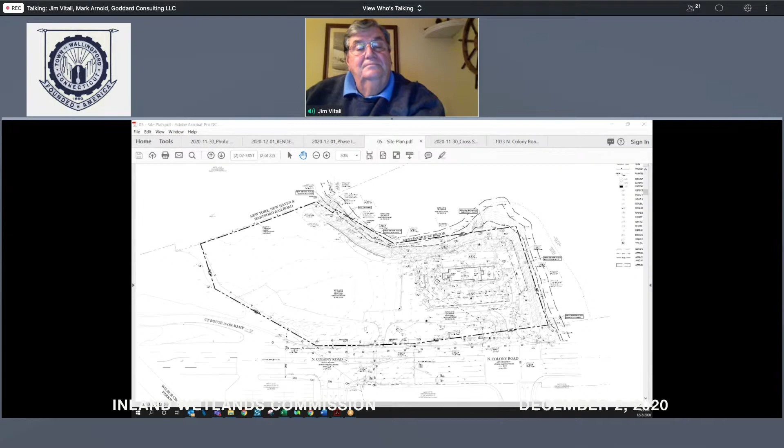Josh has pulled up the existing conditions plan. To the north we have the Sonic development, with the building fairly centered on the site. Meetinghouse Brook flows from the northeast to the southwest of the site, along the north and west sides of the property. The northwest corner is where we found a natural shelf of floodplain soils, deposited by a fairly large flood. We found deposits of about 23 to 28 inches over a buried topsoil, which is typical of a floodplain, consistent with what I've seen during my master's work in soil science.

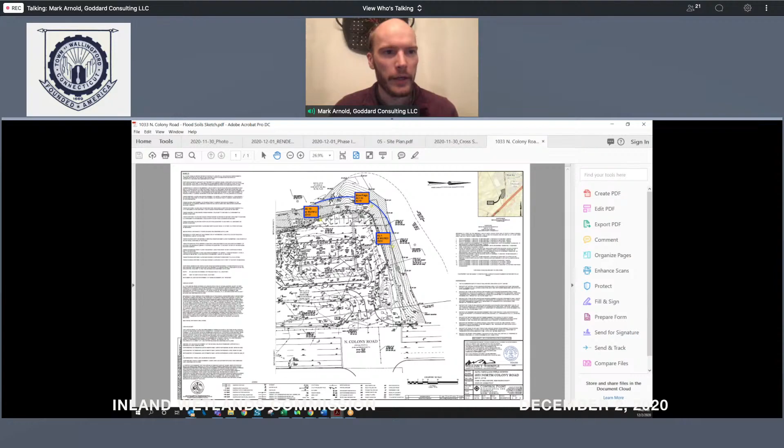That area is flagged S12 to S21 in the northwest corner, over 100 feet away from the proposed Lot A, where the development is proposed. As Josh shows the cursor there, in that northwest corner, we found a nice shelf about 4 feet above the existing flow pattern of the stream, with a buried floodplain soil meeting the definitions for floodplain and alluvial soils protected by your commission. We reviewed the rest of the bank flags to see if there were other places with fluvial or floodplain soil deposits, but we didn't find any others.

We did review the original delineation for the Sonic project and the other two buildings. The delineations are fairly consistent with respect to topography and the edge of the bank, and we feel that we have a consistent delineation.

You'll notice that the existing conditions plan doesn't show those floodplain soils, but as they are more than 100 feet away from the proposed project, we didn't think it was necessary to put those on this plan. They're located off of S12 to S21, and you can see the location of S21.

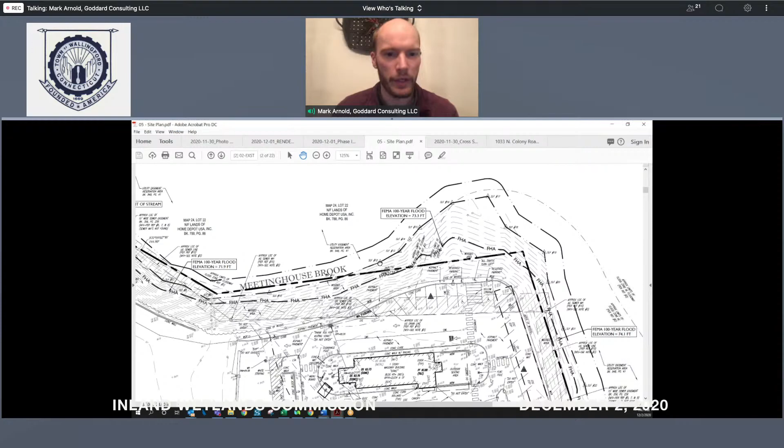It's more than 100 feet away from any proposed work, which is far south of the Sonic building. So those are the existing conditions. I'm glad to answer any other questions from the board about the existing conditions and just to make sure the resource areas are understood.

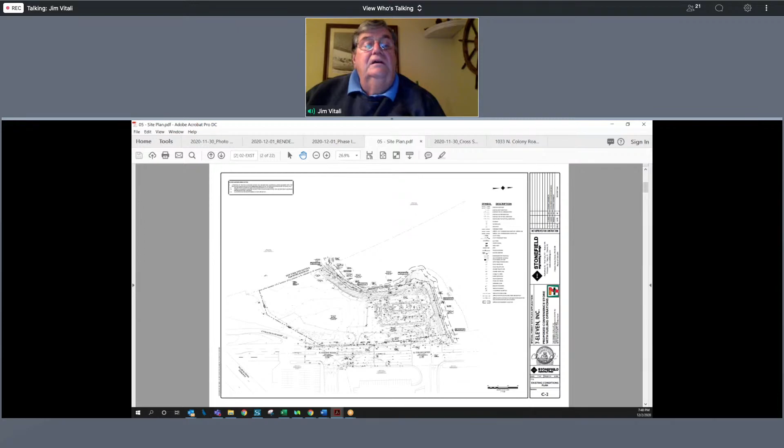I don't know if the commission's got any questions at this point. I think we can, so I'm gonna pass it over to Josh. He's gonna present the proposed project, and again, I'll be here to answer any questions about the resource areas and impacts if needed.

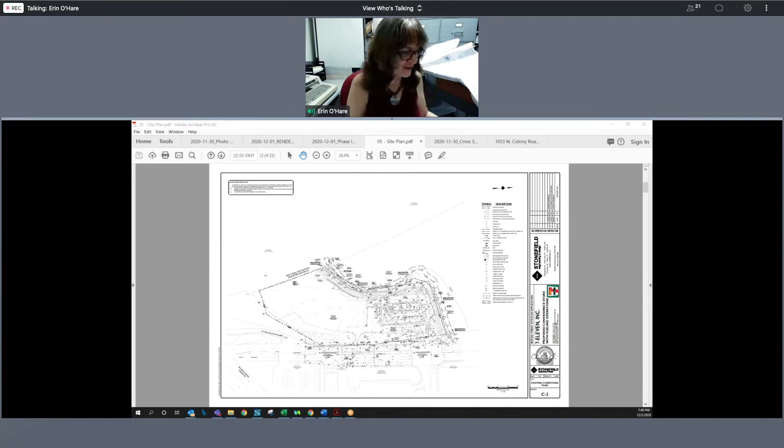Mr. Chairman, can I ask the soil scientist a quick question? If I may, yes? Yes, sure. Oh, I didn't know if I was being heard. Okay.

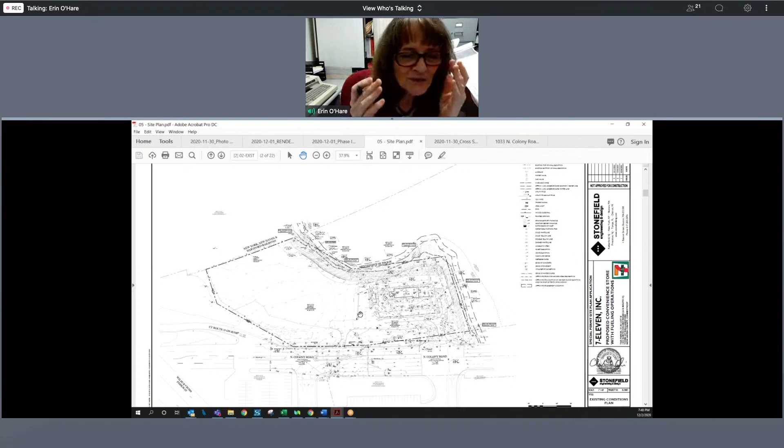I sent out a copy of the 2009 soil plan attached to my October environmental planners report, which I believe you got. I hope you got it. Okay, so I guess fundamentally, that person, Tom Petrus, was the soil scientist for that application.

And he shows the alluvial floodplain soils going right down, clear down, all the way south, right? So my question is this: I've never been in the field with someone to educate me as to when you have floodplain soils - they come up, they're deposited, it's sort of like a moving thing.

They're constantly being deposited. So tell me if this could be it: could it not be that the day he was out there had been a lot of storms, and then a big storm comes through and washes it away, and now you go out and there's no deposits - they've been washed away? Or is that not how it works with alluvial soils?

It is very possible that you could find that. It would have to be a fairly large storm. The deposits we found were 23 to 28 inches deep, so that was a pretty significant storm.

It could have been more than 100 years ago that there was a flash flood in that area that deposited over 2 feet of sediment on top of an original topsoil. So in the sense of this site too, the stream area would also be floodplain soils because it's within the stream bed.

So I guess from his delineation to our delineation, we would rather call it a bank versus actual floodplain deposits that are in the river. But otherwise you can see the bow that he has in the northwest corner of his plan - that's the same bow that we found on the shelf there, which makes sense consistency-wise.

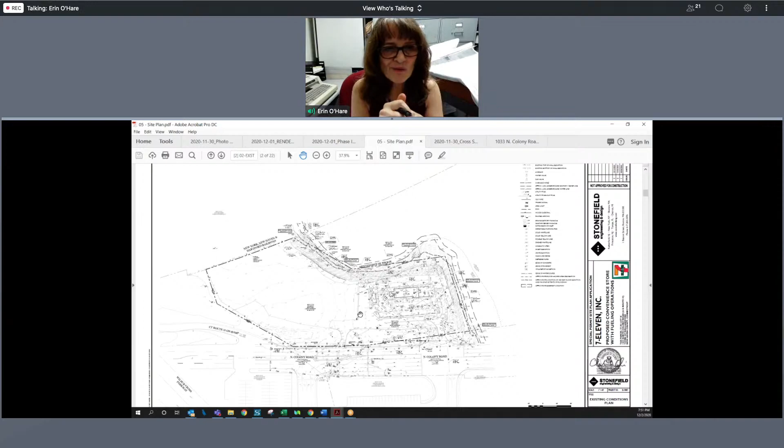Right, because it's lower. It's lower, and also the outer curves of the river are going to see more erosion than the inside curves.

So as the river flows to the west, it turns sharply to the south, and on that curve, the undercut is pretty significant in the northwest corner of the river there, where it turns off site. It's a pretty significant undercut that's happening there, and that's changing constantly depending on how large the storms are each year. All right, thank you.

Jim? I have a question for him. Go ahead, Nick.

When we approved the Sonic to go in there, we talked about that lower area he referred to and pointed out to us. My understanding was they were going to get it stabilized and leave it alone. Now the new 7-Eleven is supposed to go south of Sonic in that parking lot area. I went by there today and saw they were doing some core boring. Is that samples of the soil that's sitting there, or what's the outcome of that?

Are we going to get a report on what you're doing there today with core bores? Josh, do you have a picture? I saw some of the geotech data, but Dennis, you might have a better idea of the more recent borings, maybe at the direction of the owner. We already performed geotechnical testing across the site, and that was included in our engineering report that both Erin and Allison reviewed. We have gone out and done testing throughout the project area.

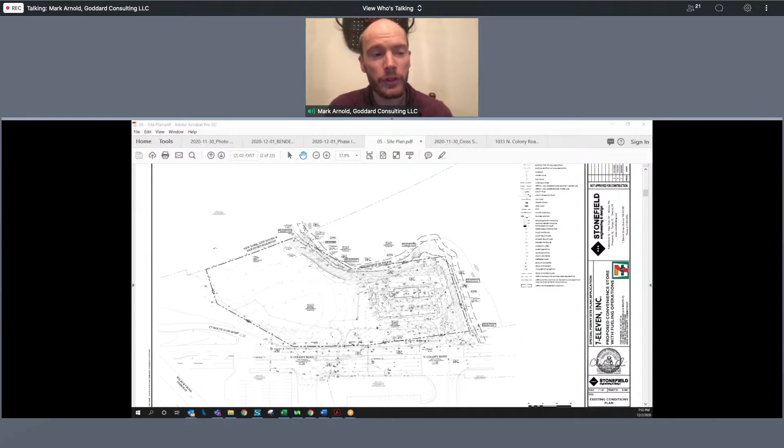All right, because it's a 7-Eleven, you're going to have underground storage for fuel. Are there special permits you have to get from DEP being this close to the brook?

It's probably a better question for me. I'm happy to take over and give a quick rundown and presentation of what the proposed improvements are. Mark, I don't know, I'll leave it to the chairman. If there's any other questions, I can definitely take over and give the full presentation.

I'm not sure if Nick's question got answered. I was looking for the answer. What was the question again, Nick, regarding the tanks being installed?

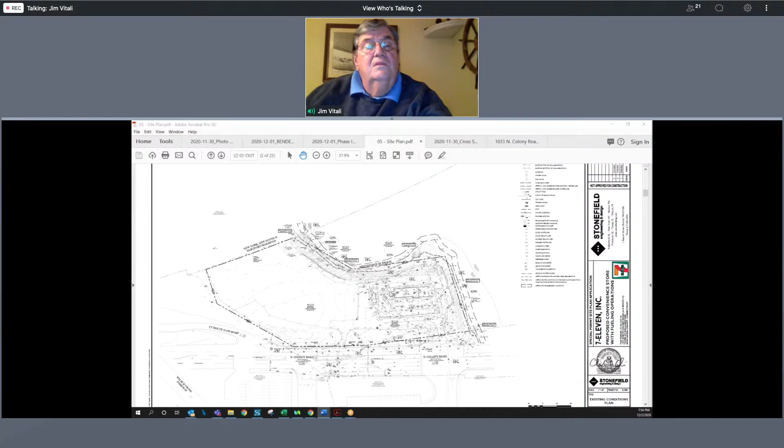Well, I'm concerned about the type of soil that's there, and because we're so close to the brook with environmental issues, are there any special permitting that needs to be done through DEP or the state of Connecticut to put underground vaults for their fuel, their petrol? Is there special sensors that need to be put in because of that area?

The other concern I had was they're going to be south of Sonic, that whole big vacant lot. You can see it in the picture here. Are they not going to be anywhere near the brook? I hope, unless they're going to do some more stabilization to that brook. But the focus of the 7-Eleven site is going to be right off North Colony Road, in that big parking lot, where today they had a hole tester doing core bores.

So I'm just confused — all I asked was, are there special permittings because they're so close to the brook? What, you know, is it a fiberglass tank? Are they steel tanks? What's going in the ground for petroleum products? What special permits are needed to do this project on this site?

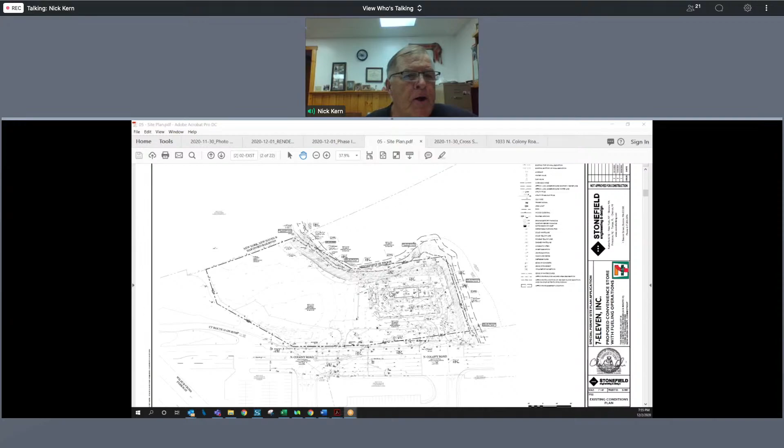Yeah, that's no problem, happy to answer the questions. I apologize, my camera went down. So the tanks are regulated by the state, so they do need to be in accordance with the state of Connecticut requirements.

Just to give some background on the tanks themselves, these will be double walled — I'm just pulling up the section. There are multiple layers of safety nets in place when it comes to these tanks, and they will be installed in accordance with state requirements. So these are double walled underground tanks, with space in between the tanks. There's also a sensor located between the two tanks that is fed through an automatic tank gauge.

So basically this monitors the tanks and monitors that inner wall in between the two tanks. These are modern day double wall tanks, to the highest state standard. But if there were ever any intrusion or issue, there are sensors that would immediately notify the tenant. They are monitored daily, and all this information is reconciled and provided to the state because of the tanks.

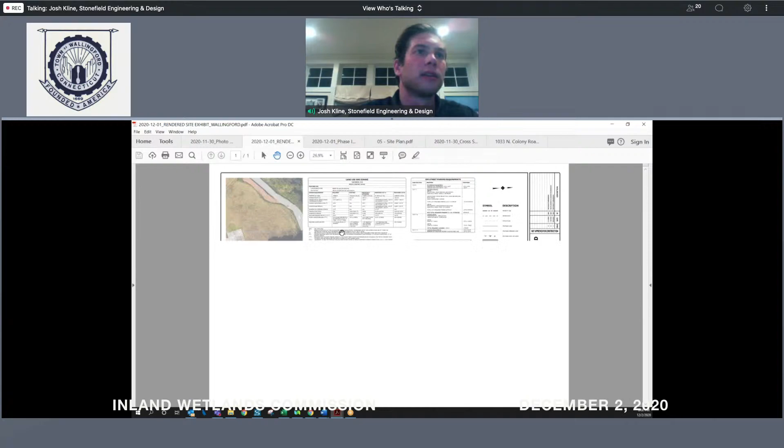Snow storage has definitely been thought about, and we will not be putting snow on top of that slope. I'll share my screen and pull up the plan to give you an idea. Here's the existing condition as Mark went through, with Sonic on the right-hand side of the screen. A condition of approval would be agreeable that no snow would be stored at the top of this slope. There'll be areas carved out along the left-hand side of the page, along the on-ramp, as well as some areas down on the frontages where snow will be stored, but no snow would be stored on top of bank.

Okay, is the state of Connecticut going to allow you to store snow in front of the entranceway for the 7-Eleven, that close to the railroad traffic? We're working with the state. The project does require approval from the state, and snow storage areas will be represented to the state. We're seeking an encroachment permit for the driveway as well as the signal, and we would follow any state guidelines or recommendations. If they deem snow could not be stored there, it wouldn't be stored within any sight line. This is a signalized intersection, so we don't see any issue from that perspective. All snow would be stored, and the big takeaway for the commission is that it would not be stored along the top of bank.

Okay, thank you, Josh. It's a funky stoplight, I guess.

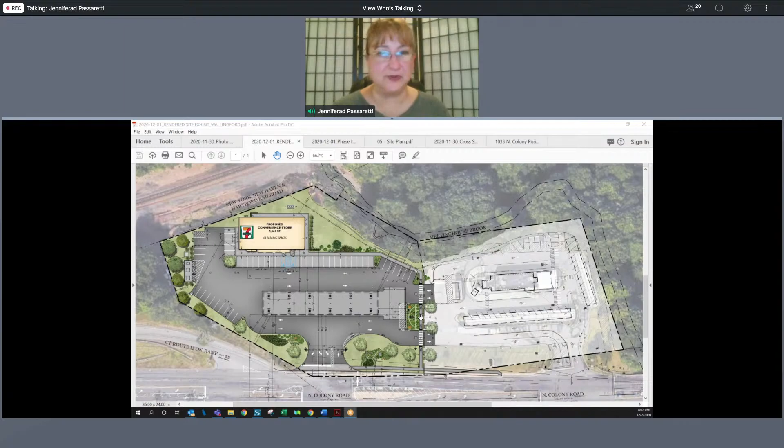What kind of control plan? A spill control plan in the event that there is some sort of issue. I know that they're going to be monitoring, and employees are going to be trained, and you're going to have spill kits available. But will there be some sort of formal spill control plan in the event of a spill?

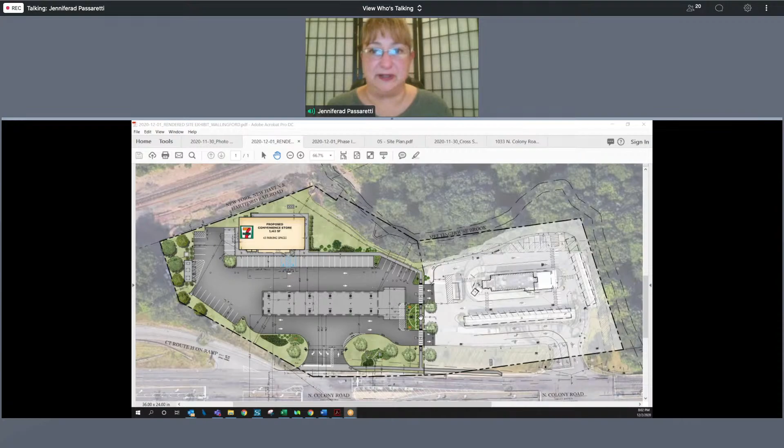So there is a standard procedure, and it is a requirement to have this procedure. It's laminated and included in multiple places, typically behind the register. So what I can do is pull up an example of this emergency response procedure. There's a plan in place noting two items: a large surface spill or substantial damage to a dispenser, and a small surface spill, with procedures for each situation.

This is included at the store and is part of the training. The key here is employees are trained to shut things down and contain the spill to whatever level they're comfortable with, depending on the actual spill. Then they immediately notify 7-Eleven or the online third party 7-Eleven uses to create a case, which is brought to the state, and it also immediately notifies a local environmental consultant who would be dispatched to the site. This is monitored 24 hours a day - the paneling, the alarm systems, all this information is closely monitored by the team.

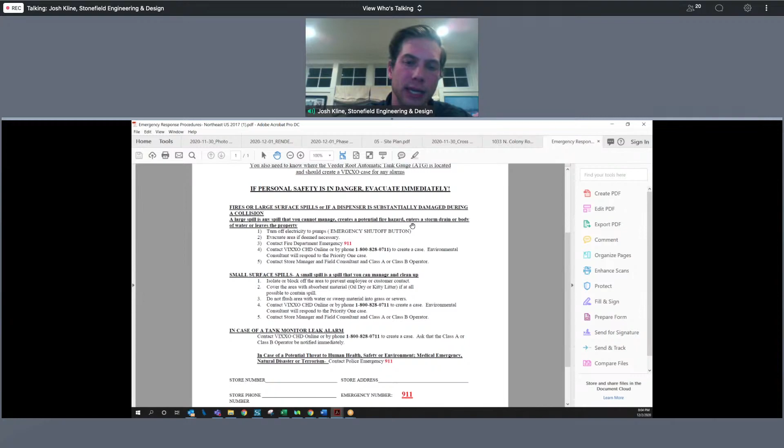Josh, two questions if I may. I missed this page you have up on the spill plan - where is that in the submittals? We did not submit that as part of the formal submittal to you. We brought it prepared to talk about based on our conversations, but didn't send the printout to you directly.

Okay, anything you show tonight is part of the record, so if you could furnish that page, would that be possible? Yeah, no problem at all.

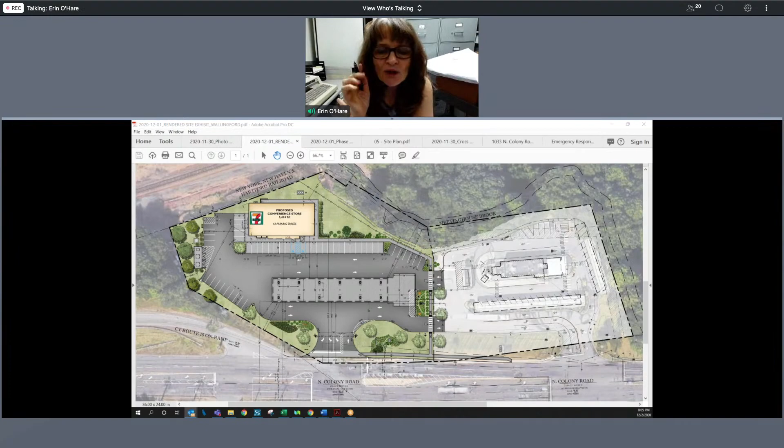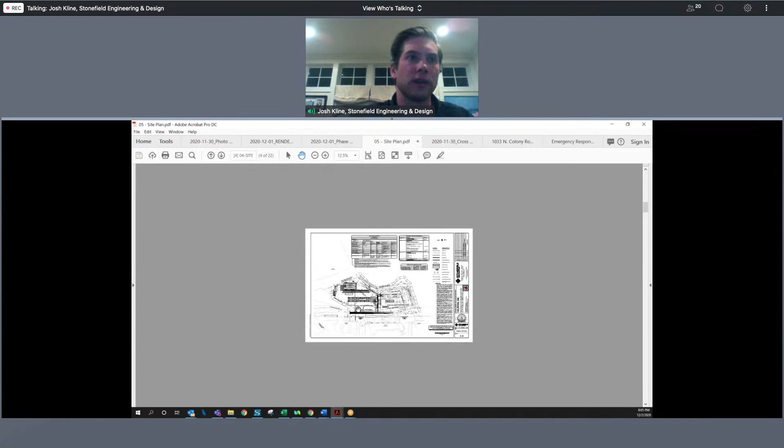And the other thing, while we're on gasoline issues, could you talk about that trench you put at the end of the gas island? Yeah, no problem. Working with Erin, understanding the sensitivity that a gas station brings to any project, the applicant is proposing a trench drain located along the north side of the underground storage tanks. One of the design features our team incorporated is that the site is graded so the area where all the dispensers and fueling pad are located drains to this isolated trench drain, while the rest of the site pushes stormwater runoff away from it. This would allow, in the event of a spill, for it to drain solely to this trench drain.

And this trench drain - I'm going to flip to the stormwater management plan quickly, sorry to be flipping so much on screen - you can see this trench drain is connected to an offline oil water separator. During a low flow event or a spill, or the water quality storm, that initial first flush would pick up any of this material and drain to this oil water separator. Then during a larger event, once that first flush is gone and there's no remnants, we've designed this manhole as a bypass structure that would bypass the larger storm events, in order not to cause any issues or surcharge effect in this outlet structure.

Josh, let me ask you this - what's the capacity of this oil water separator? We're proposing a 1,500 gallon unit. Okay, and how is it designed? It's a three baffle system.

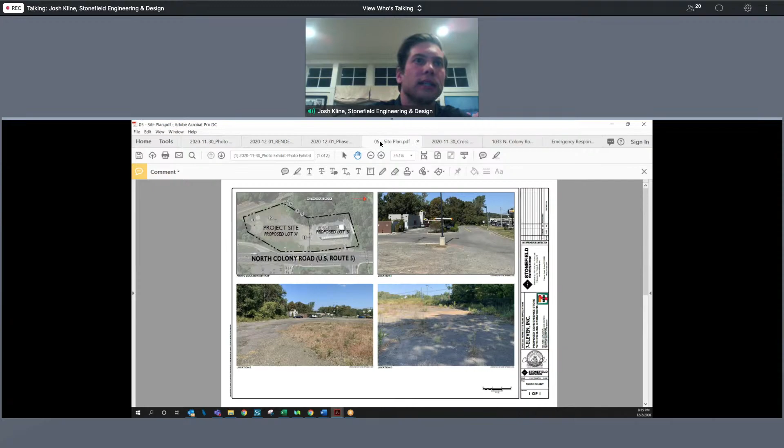In the proposed condition, one of the big changes is we're pushing the impervious surfaces further away from the slope, outside the 100-foot upland review area. We've moved the building further away. The majority of impervious surface is now located along the frontage of the site, along the state frontages. We're replanting the top of this bank with landscaping and making this a grass area, pulling some of that pavement back.

What you can see on the stormwater management plan is that all of that runoff is collected, and we've created a single point of discharge that is protected and discharges into the brook. On top of that, we're naturally having less runoff because we're providing less impervious surface than what's out there today.

On top of that, we're also treating it—we're 100% treating all stormwater on site from all surfaces. In addition, we're proposing an infiltration basin. We performed testing on site and the soils do support infiltration, so we've proposed an infiltration basin to infiltrate an additional amount of the stormwater.

Some highlights of the stormwater system, from a peak discharge standpoint: comparing what runs off now to what will run off in the proposed condition, we're reducing the 2 through 25-year storm events by over 30%, and the 100-year storm event by close to 15%. One of the big values to think about is really the volume—the total amount of runoff.

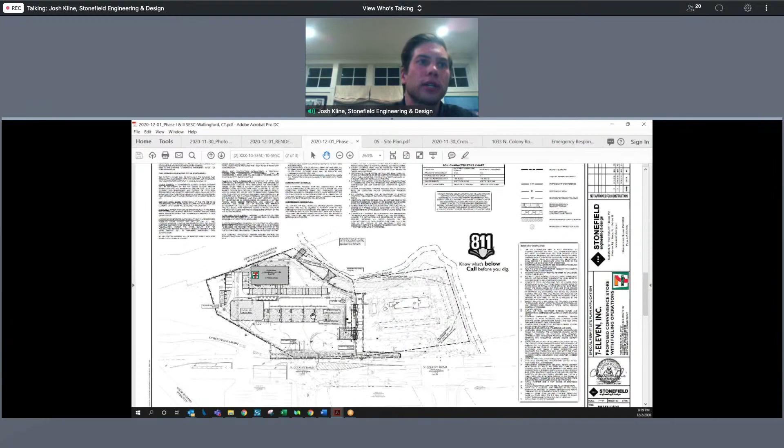We've also prepared a phase 2 soil erosion plan, showing the stabilized post-construction condition. This consists of more typical soil erosion control measures—silt fencing, inlet filters, staging and stockpile areas—and this is when those permanent controls are put in place to stabilize the site as they move forward.

Why don't you talk to me about the infiltration system you're using? Is it all going into an infiltration system, including the roof drainage from the building?

We usually like to keep that a separate, clean product—that's a great point, and really key to making sure an infiltration system operates properly. So what we're doing is sending the roof areas, which are typically clean, along with a portion of the vehicular areas, through a water quality unit to fully treat the stormwater before it enters the infiltration basin.

And what are you using for an infiltration system? We're proposing a perforated pipe system. Not an open bottom gallery, just a perforated pipe? No, the current design is a perforated pipe wrapped in stone.

And is there an outlet to that system? Correct—to mitigate that stormwater coming out, we're using an outlet control structure. And then that goes where? Following the plan, it works its way north to the Sonic property, where it connects to a structure. All the stormwater connects at a single point, manhole 104, and from there it discharges through to the outfall.

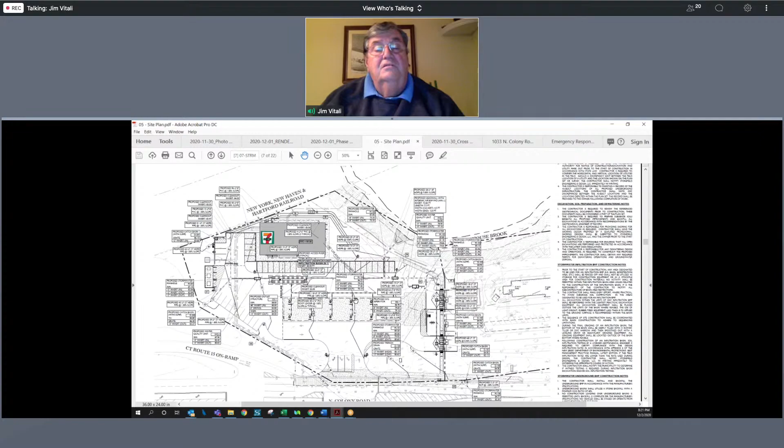So there's no other infiltration system other than the one right in front of the building? Correct. The thought process was to treat as much of the site as we could, but we're sensitive to the fact that this is a gas station. Even though we're proposing grading to push runoff away from the gasoline areas, we're not proposing to infiltrate any runoff located close to the fueling areas, just as a precaution.

But you have no retention or detention basin affecting the other stormwater runoff—that's a direct discharge to Meeting House Brook. Well, it does go through a water quality unit before reaching Meeting House Brook, but the project as a whole is reducing the amount of impervious area. So even without detention or retention systems, we're naturally reducing the peak discharge going to the brook.

Commissioners, any questions? Jim, it sounds like to me that he's got the whole underground drainage system all tied into one package that has one discharge point. I think they need to go back to the drawing table and segregate the emergency spillway. Their underground water discharge does not sound right for this application, unless I misunderstood him.

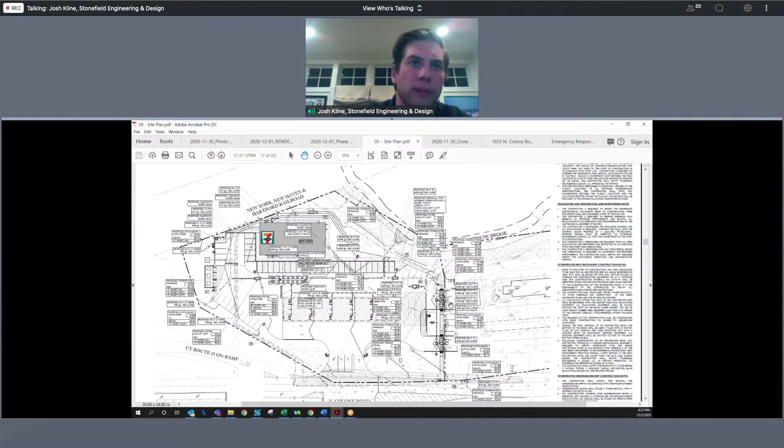And again, effort is made - we don't want to have multiple discharge points. So yes, it all kind of collects at one point. I will say, kind of going back to the design here, this system is designed with multiple controls, multiple alarms. The idea is that this system is designed to minimize spill events to the greatest extent we can.

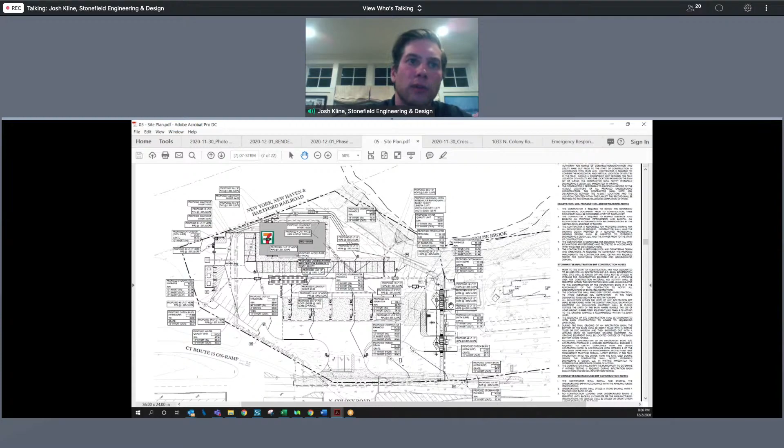And what we're doing in terms of having a water quality unit, providing the oil water separator, kind of allows for those additional precautions to mix in there as well. So we're happy to provide another additional item you kind of see with gas stations.

And we would, if it helps resolve some of the concern you have, we can do kind of grooved concrete around the perimeter of the dispenser islands, so that maybe any of those little remnants you're concerned about would be caught in there. And that would be observed and viewed by the 7-Eleven team, and they would be responsible for cleaning that up in a situation that it would need to be.

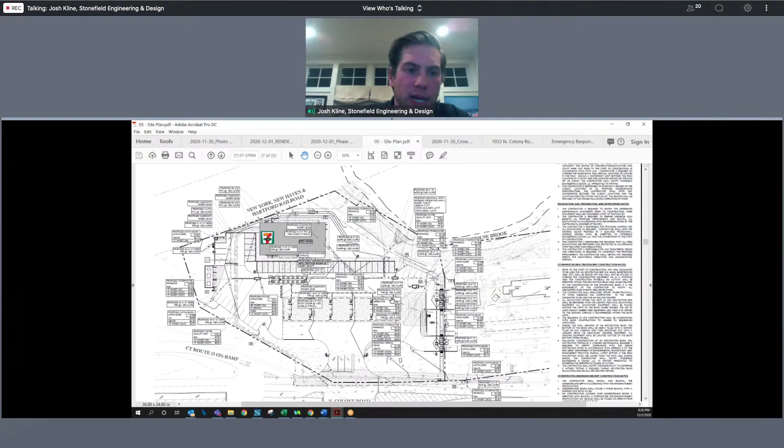Well, that's what I'm trying to say - I think you need to go back, not to the town of Wallingford, but to your 7-Eleven team and say, hey, Wetlands brought this up as an issue, how do we address it? Maybe there's another way they can contain it and segregate it if it needs to be segregated. But this is not going to work as a water oil separator, water quality system at this site for what you guys want to do.

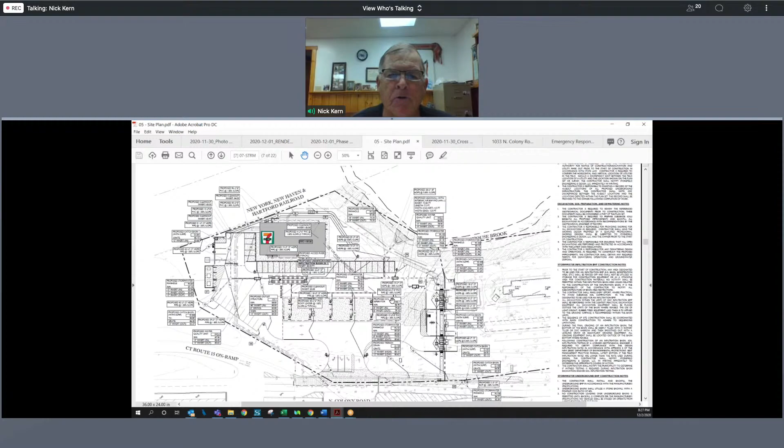So I can understand Wallingford Water and Sewer Department being concerned because this is one of their pet peeves, but this system is not going to work on 7-Eleven sites. So I'd go back to your gas people and say, hey, we have an issue here, we need to mend it.

Josh, I've been involved and I have seen systems in a drainage system with oil water separators that actually have a valve in the system, so that before it got too far down the line, you could open a manhole and shut the valve off to the 12-inch pipe. Might be something to look at.

Any other questions, commissioners?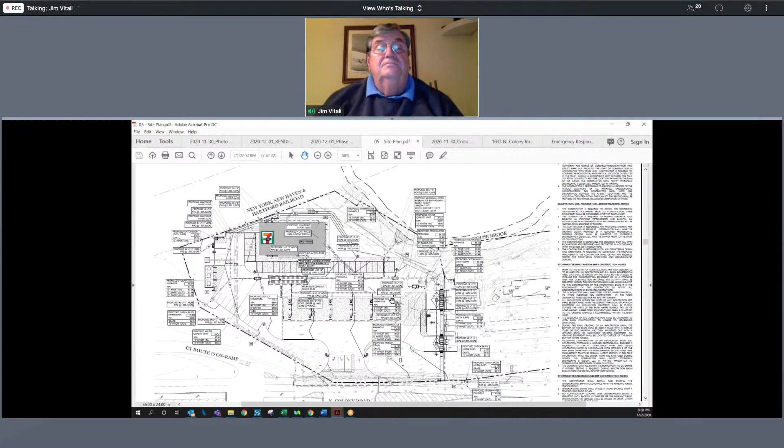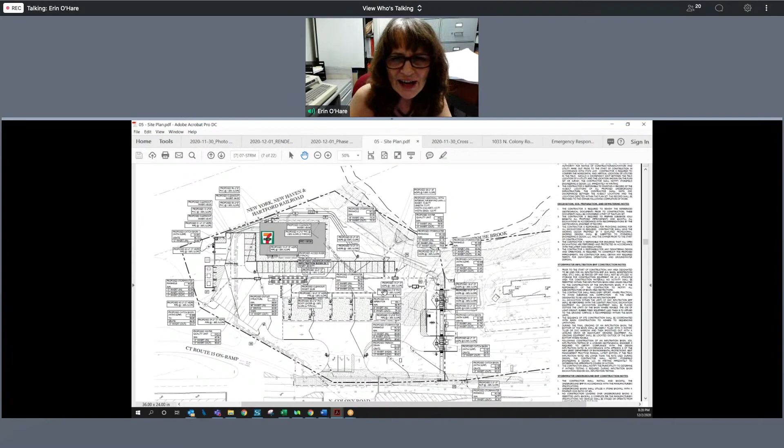Erin: Before we get to the next sheet that I know Josh is going to go over with the slope issues - Josh, you've said several times that the overland runoff from this site today goes over that slope and can cause erosion, so I'm confused. Maybe tell me about that unique little low concrete wall, about 9 inches high, that runs along the top of the slope by the brook, at the edge of the gravel parking area.

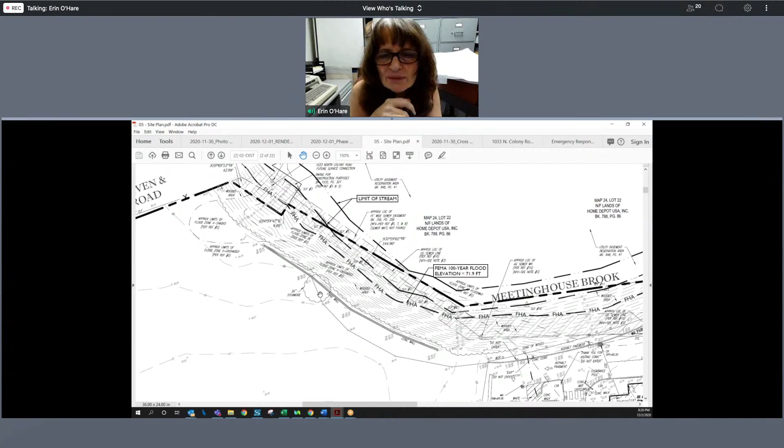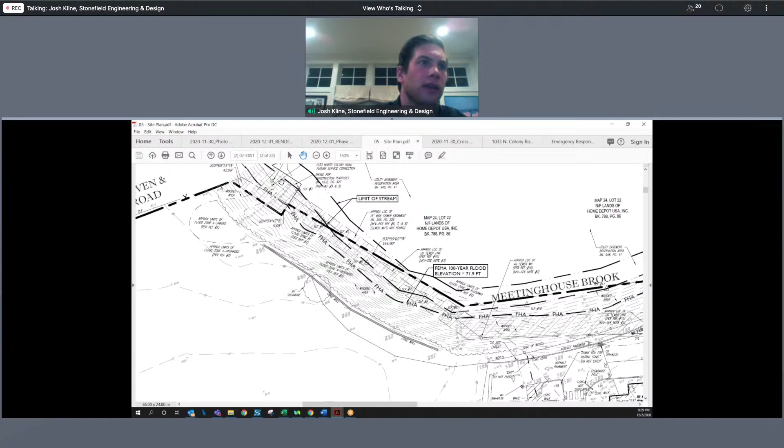Right, where you're pointing, right there. Doesn't that hold it back, or no? Is it porous? Not really - the concrete wall is in disarray, and water still kind of sheet flows on either end of it. If the wall were to fully act, it would probably create an even worse condition than water spreading out and flowing evenly over the slope, because it creates two discharge points at the top of the slope. But based on when I was out there, it may divert some runoff - the majority of this runoff is kind of flowing down over the slope regardless.

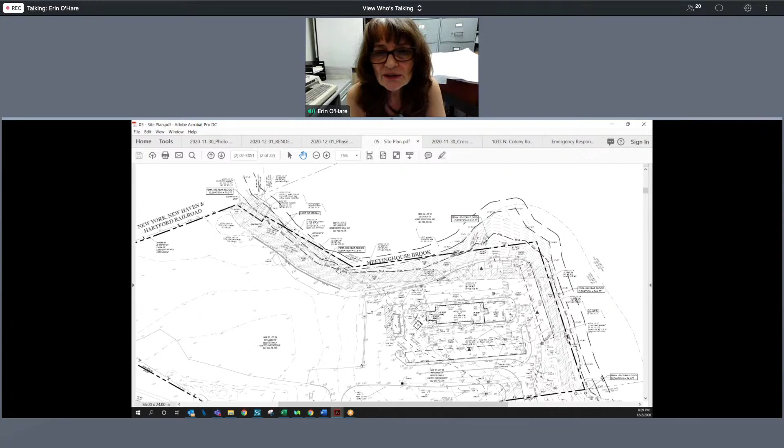That little low wall is only about 8 inches - it's really not a wall, more like a big curb. Whatever it is, it's gonna stay, correct? We're looking to maintain it, just to minimize the amount of disturbance within the upland review area. Okay, good, thank you.

Okay, next - go ahead, Josh. You got more to show us?

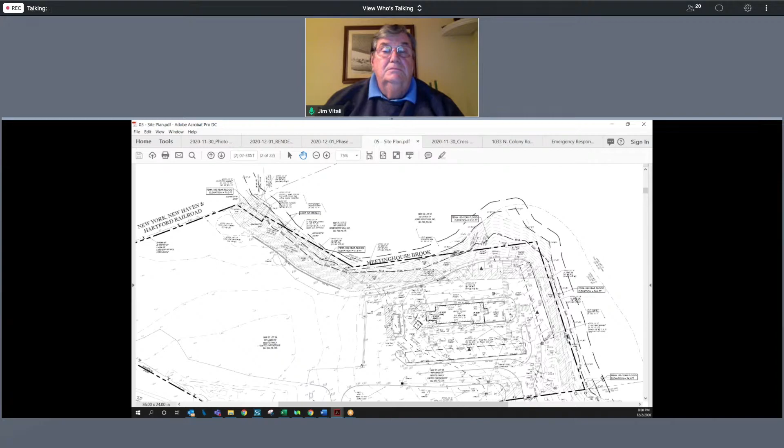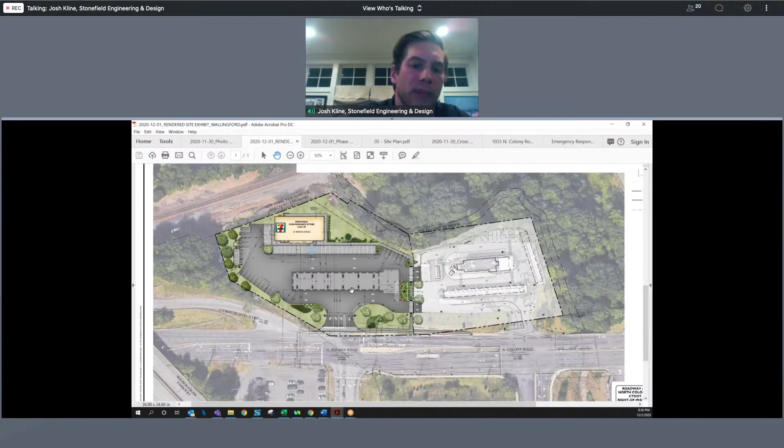I think we've touched on most of the scope of the improvements, so I'm happy to answer any questions or provide more information. I think we've heard some of the concerns, and that's something we're going to take into consideration. A lot of the items we've been working through with Erin, our office has really taken to heart and looked to address, and we feel that at this point we're providing a good plan that does look to minimize the impacts to that slope and to the brook.

Let me just point out - you drew a nice plan, that's fine, you did everything you think is correct. Now you've got to find a builder that can do the work and keep the environment safe. You have a steep slope, it's going to have a rundown, it's going to have a pipe sticking out, you're going to be over there with the sewer line.

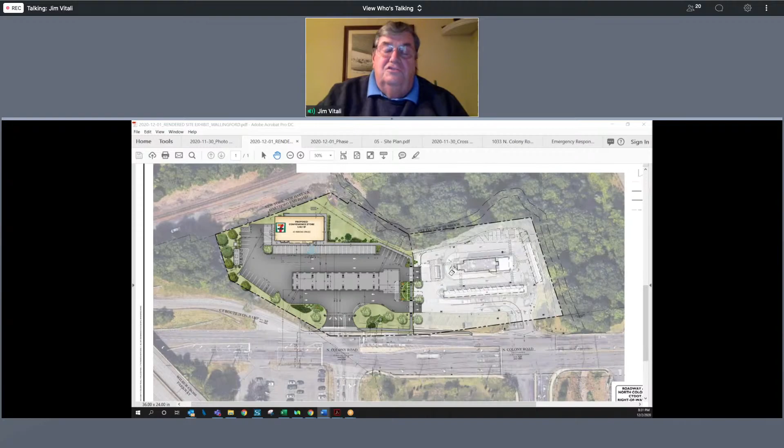I think your next presentation has really got to focus on how you're going to construct that when the time comes. I'm happy to talk about the construction of it. Josh, are you going to put up that cross-sectional view you emailed me tonight? Yeah, no problem. I think that's a great point - a key to any project is a good contractor.

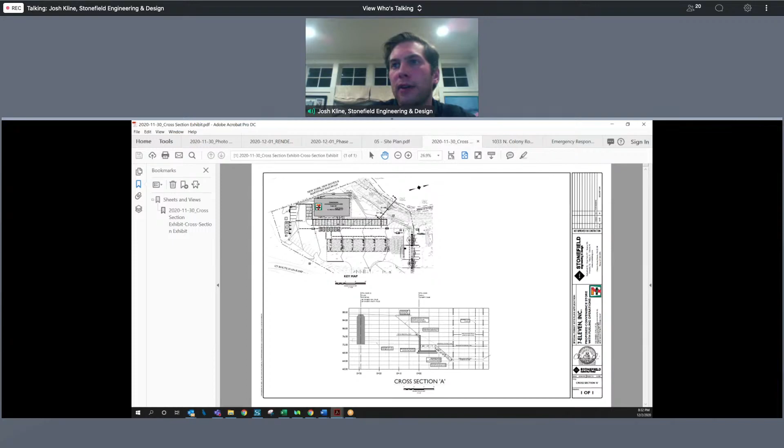There are definitely a few different means and methods a contractor could use to construct this slope. Based on our proposed disturbance and feedback from working with Aaron and the previous approval, we've looked to maintain that minimal amount of disturbance. You could accomplish this through the use of trench boxes, or various ways of temporary shoring, in order to install these improvements within the slope.

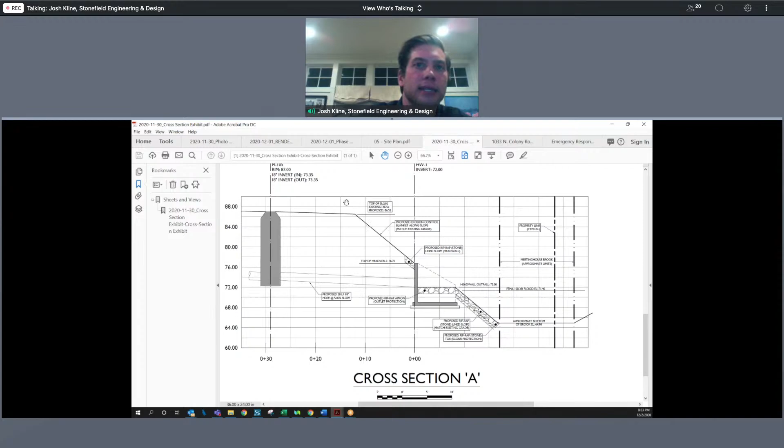So as requested, we put together a cross section which highlights the proposed improvements along this slope. A couple things to note: we are providing a riprap toe, basically scour protection at the bank itself, and we are going to be riprap lining the proposed slope. We have a riprap apron for the outlet protection to dissipate the velocity within the head wall. We're also providing an additional toe - a riprap lining above the head wall itself - to help stabilize this proposed slope. The proposed slope will then be lined with an erosion control blanket to stabilize it as well.

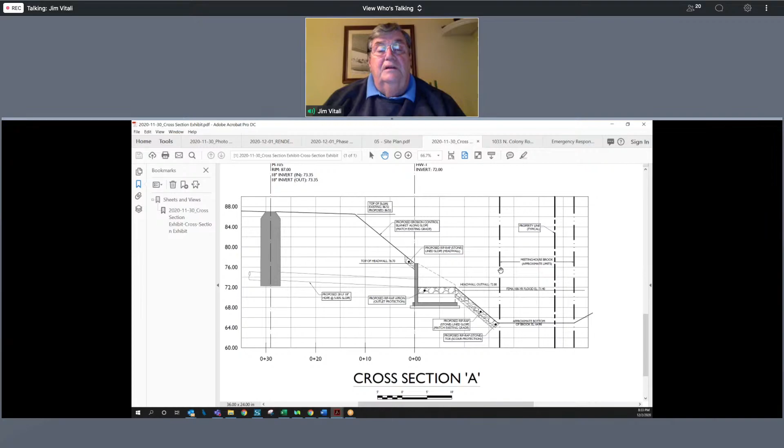Meeting House Brook is notorious for washing out, mainly because of stormwater coming down from adjoining property, not property in the town of Wallingford. With this riprap slope out at the end of the discharge area, I'm wondering if it makes more sense to spread the riprap out further upstream of Meeting House Brook. I'd hate to see one of the crazy floods wipe out or undercut the riprap, and next thing you know the head wall falls out. I think that needs to be looked at, which you may have already. I'm just pointing out my observation.

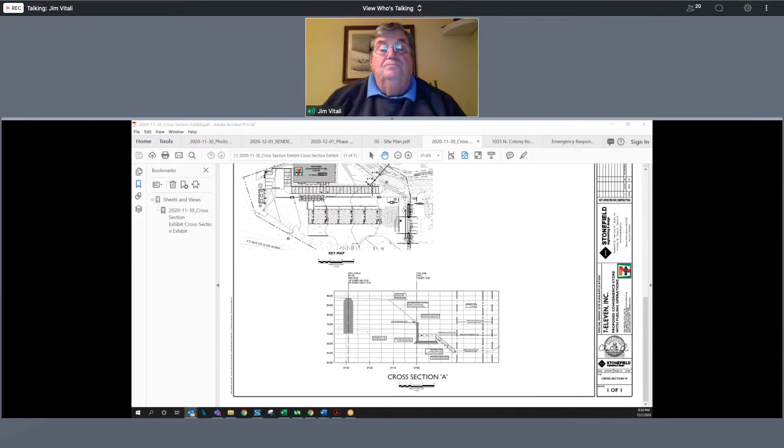Yeah, Josh, I believe the riprap is set above the floodplain, so we've considered the flooding already in the sense of where we've placed it. Josh's plans are pretty detailed. I'm a certified professional in sedimentation and erosion control, and I inspect sites under construction near rivers and resource areas, and Josh's cross section is an excellent example of how a site's supposed to be stabilized. I think the details provided have definitely been carefully considered to protect the environment.

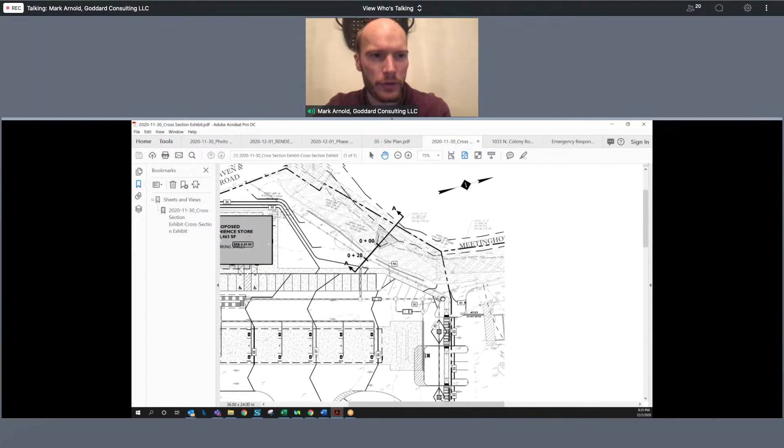There's definitely superior plans to what I've seen in other projects I've done with regards to that. You'll notice the riprap does fan out as necessary on each side, and it goes out beyond the edge of the head wall, so there's extra protection above and below for that anchorage. Again, the head wall is above the floodplain. The bottom of the riprap stabilizes that slope, and the sizing is large for the scour of not only the river but also any discharge that occurs. That large riprap proposed there is specifically for the situation.

Well, I know along that brook we've actually had some people we requested, and they installed gabion baskets in a very sensitive area. Just curious if that might not be that little extra protection on the edge of this riprap slope.

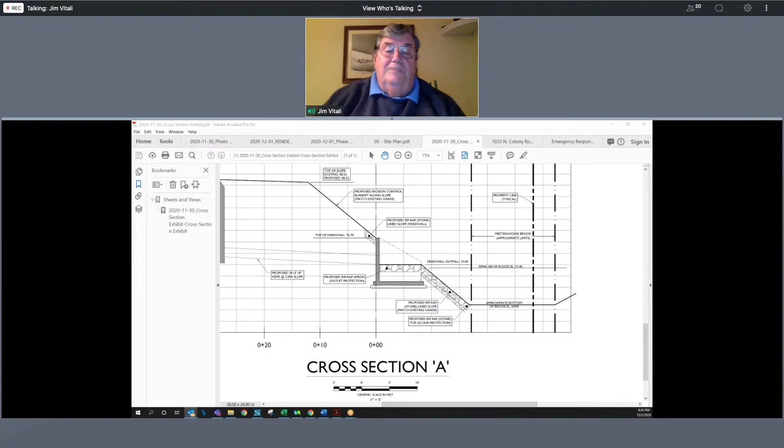There is a riprap slope right next to the Amtrak entrance itself. That was actually installed in the last, I think, 3 years. There was work on this riverbank that installed riprap near the sewer manhole we're connecting to, and they used riprap in that slope, and that slope has stayed stable the last few years since they've done that work. So it's been done in that area, and again, the contractor's done it. Josh has done an excellent job narrowing the disturbance areas to minimize disturbance as a whole, which is critical, and providing adequate erosion control here, I think, which is good.

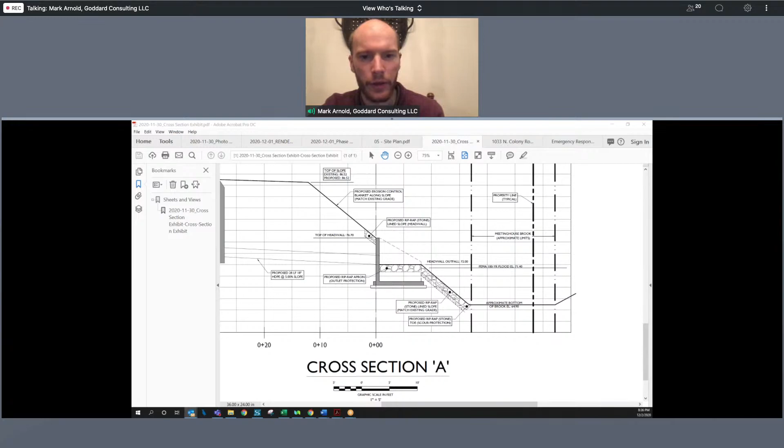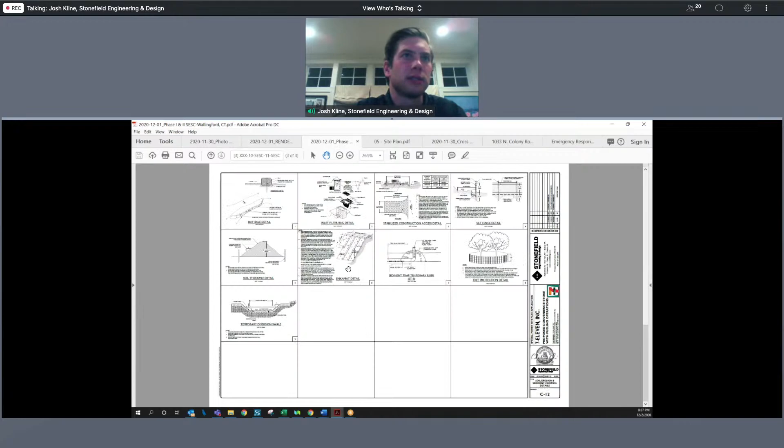How big, what size riprap is proposed right up against the river? I believe the plans call out, in accordance with state requirements, I think it's like 6 to 12 inch riprap. Thank you.

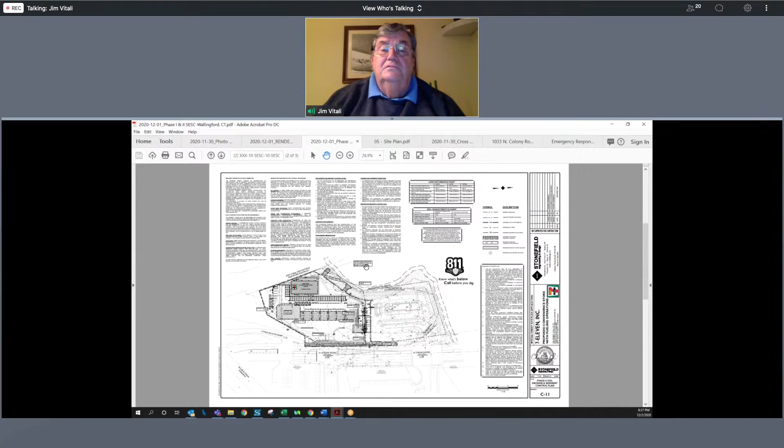Okay, any questions, commissioners? All right, is that the end of your presentation, Josh? Yes, again, if there's any other questions, I'm happy to provide some additional information.

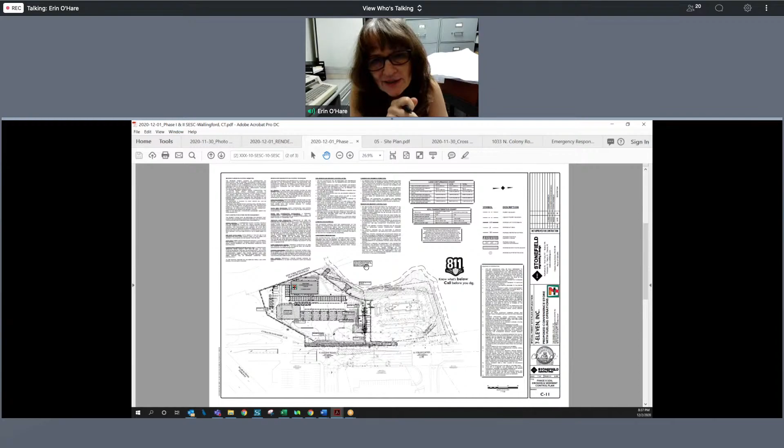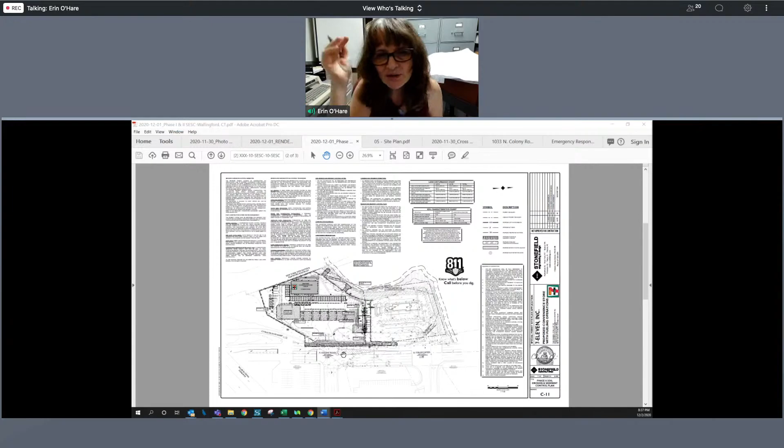If I may, I think, Josh, maybe the commission would like to hear how actually that pipe is installed. Is it 14 feet below the ground, or how do you do that, the mechanics of it? There's a few different ways it could be installed. A contractor could use various temporary shoring methods, or trench boxes to install the system, and it's all done from the top. You don't have to go down. A big excavator goes over the top with the arm of the excavator, and they would excavate it out to install the improvements.